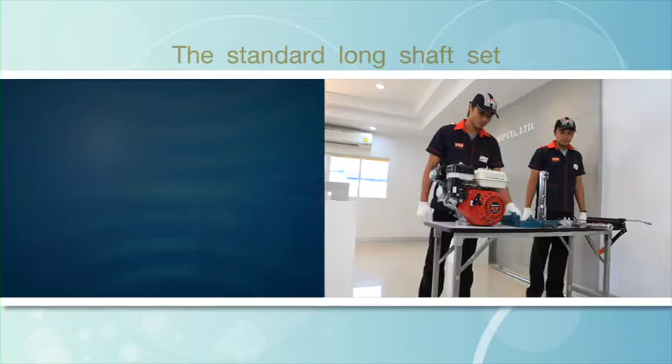The assembly of standard long shaft sets is conducted through the following steps.

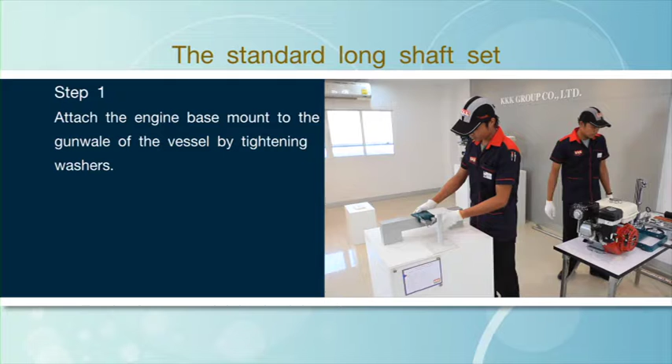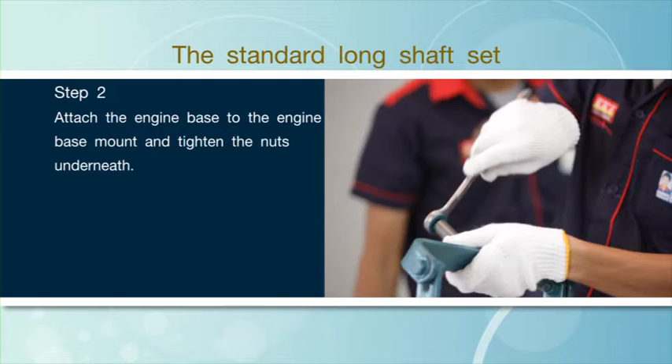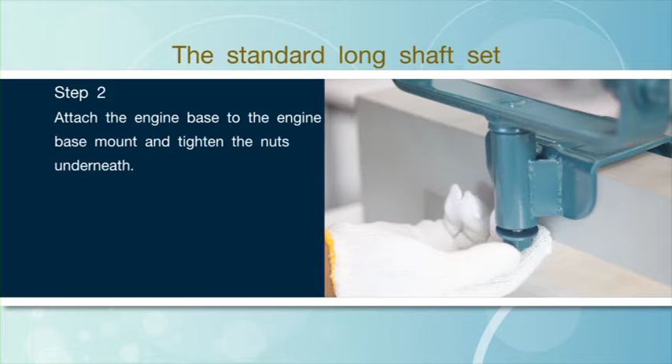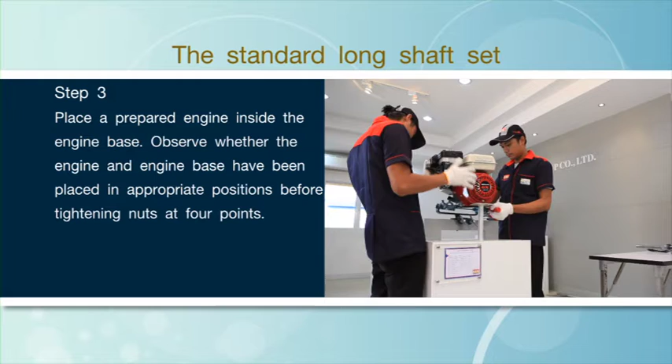Step 1: Attach the engine base mount to the gunwale of the vessel by tightening washers. Step 2: Attach the engine base to the engine base mount and tighten the nuts underneath. Step 3: Place a prepared engine inside the engine base. Observe whether the engine and engine base have been placed in appropriate positions before tightening nuts at 4 points.

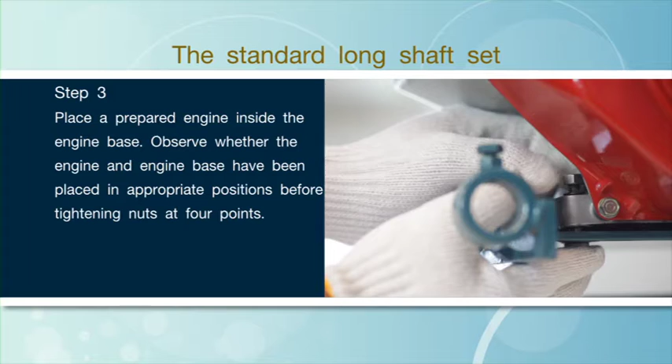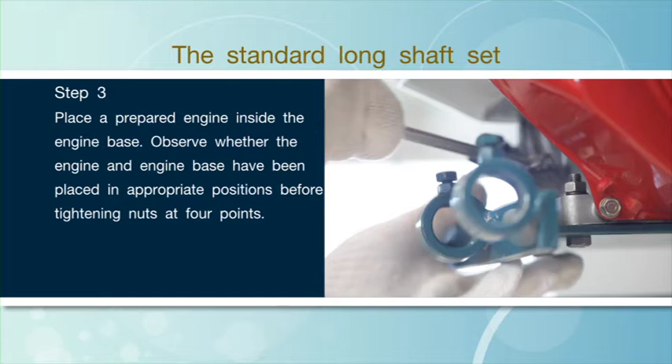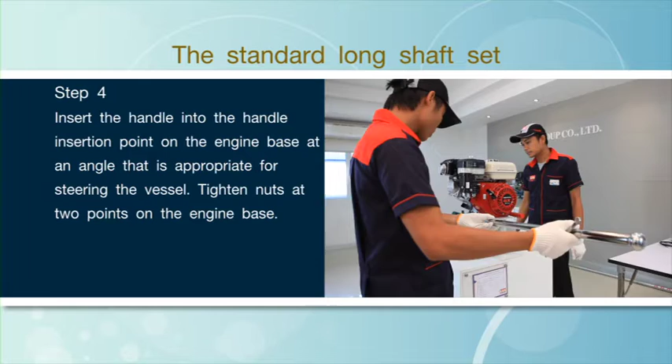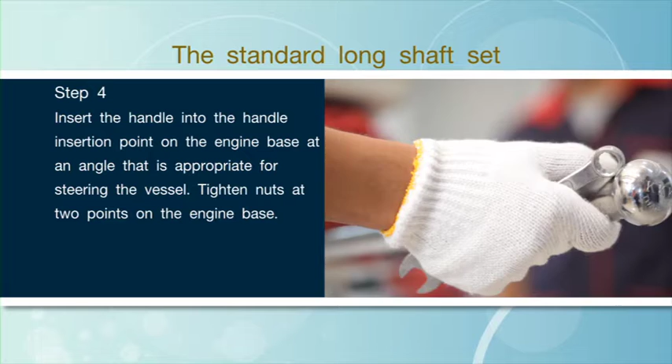Step 4: Insert the handle into the handle insertion point on the engine base at an angle that is appropriate for steering the vessel. Tighten nuts at 2 points on the engine base.

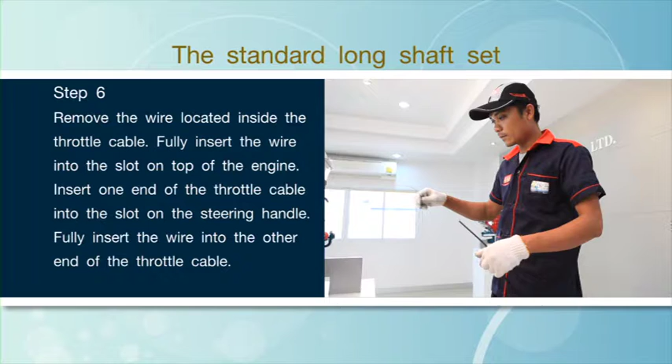Step 5: Unscrew the washers fastened to the filter plate that covers the throttle of the engine. Step 6: Remove the wire located inside the throttle cable. Fully insert the wire into the slot on top of the engine.

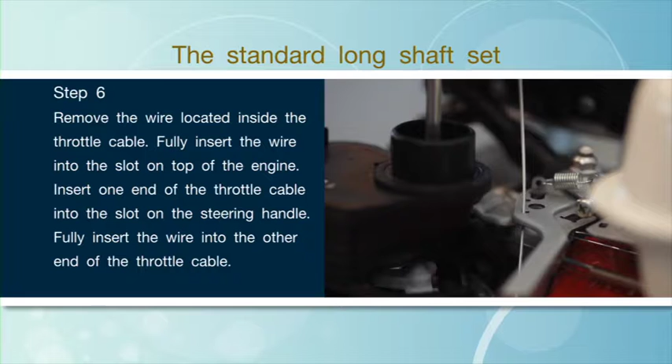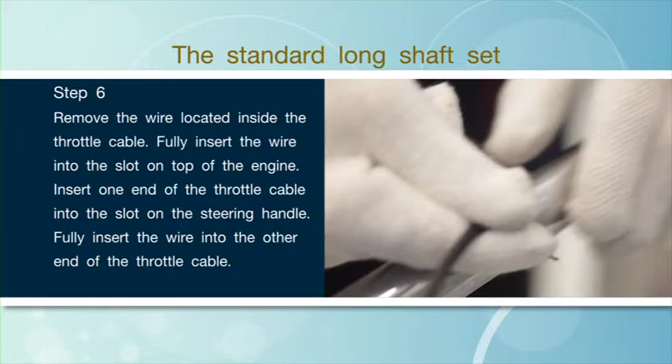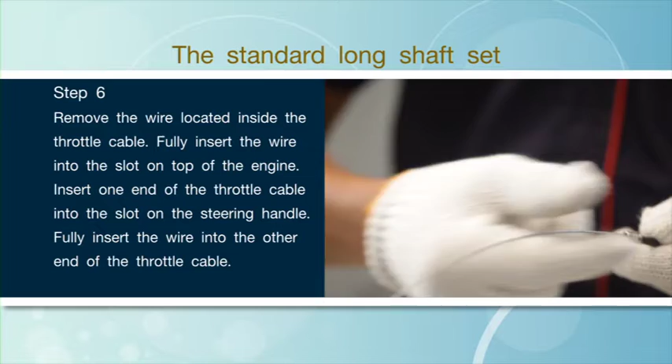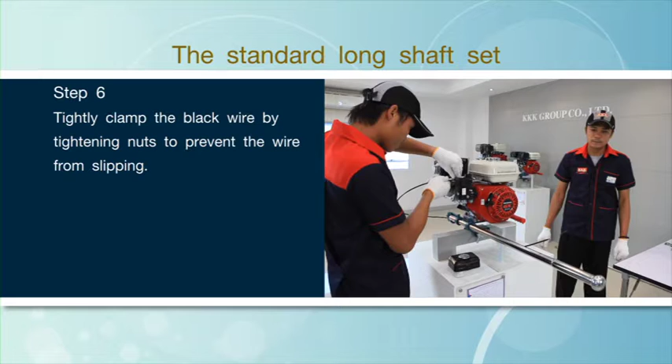Insert one end of the throttle cable into the slot on the steering handle. Fully insert the wire into the other end of the throttle cable. Tightly clamp the black wire by tightening nuts to prevent the wire from slipping.

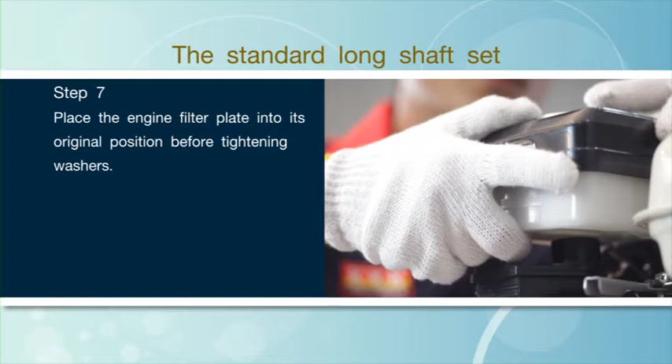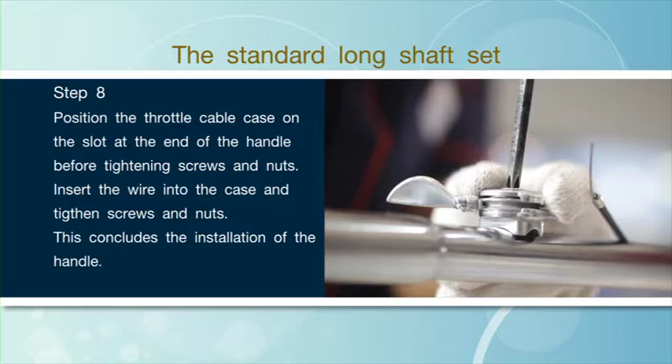Step 7: Place the engine filter plate into its original position before tightening washers. Step 8: Position the throttle cable case on the slot at the end of the handle before tightening screws and nuts. Insert the wire into the case and tighten screws and nuts. This concludes the installation of the handle.

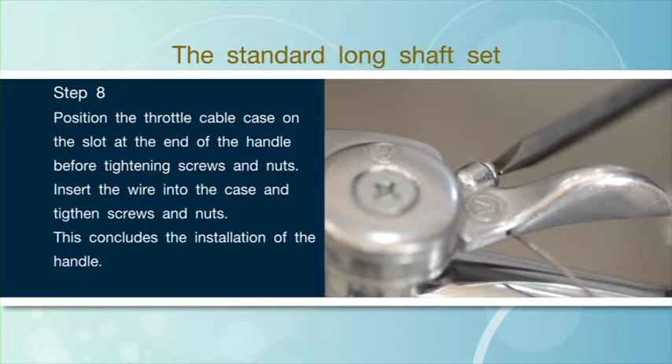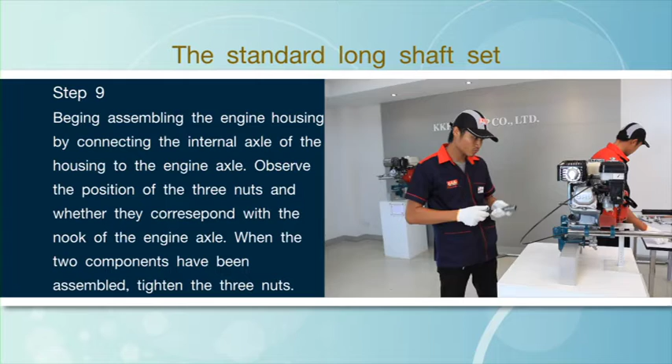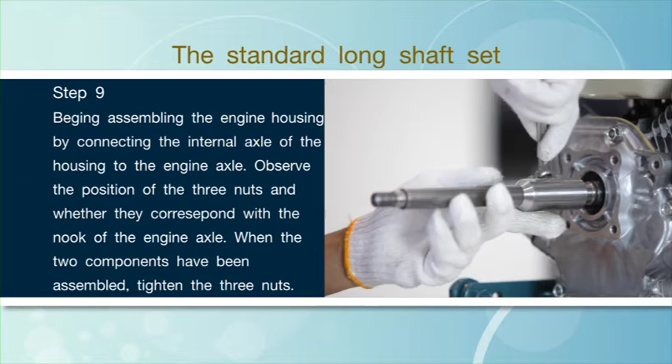Step 9: Begin assembling the engine housing by connecting the internal axle of the housing to the engine axle. Observe the position of the 3 nuts and whether they correspond with the nook of the engine axle. When the 2 components have been assembled, tighten the 3 nuts.

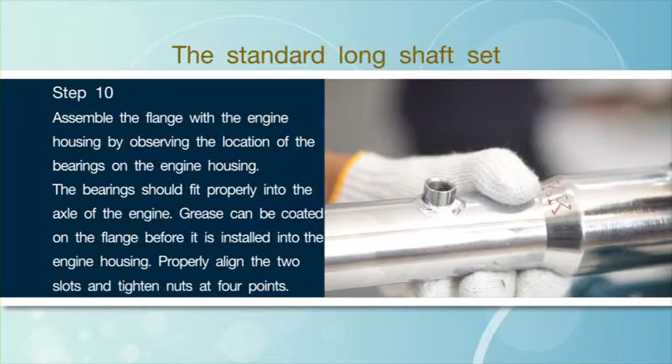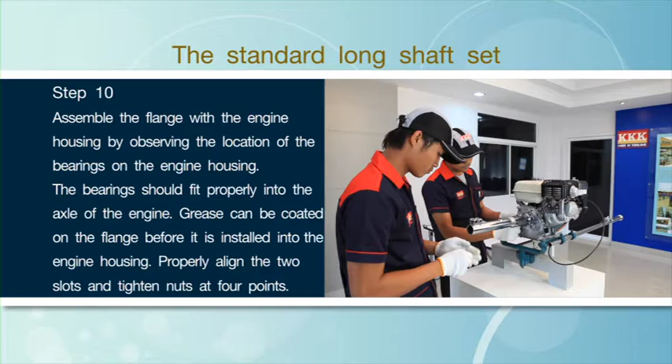Step 10: Assemble the flange with the engine housing by observing the location of the bearings on the engine housing. The bearings should fit properly into the axle of the engine. Grease can be coated on the flange before it is installed into the engine housing. Properly align the 2 slots and tighten nuts at 4 points.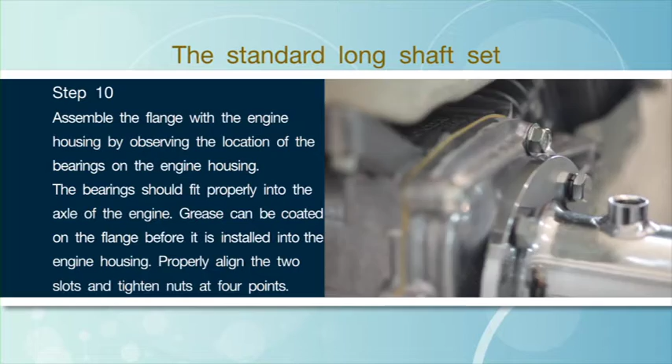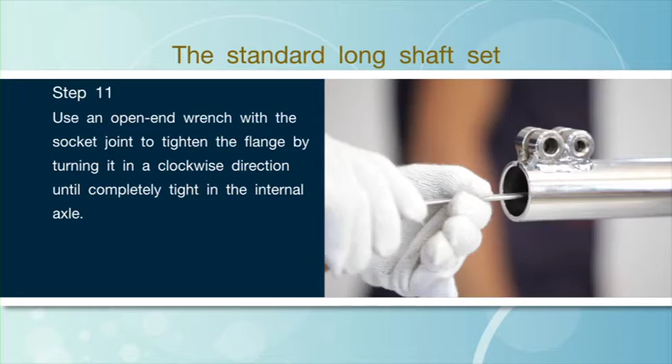Step 11: Use an open-end wrench with the socket joint to tighten the flange by turning it in a clockwise direction until completely tight in the internal axle.

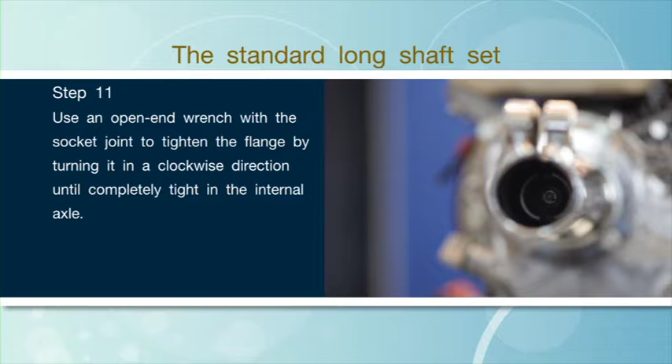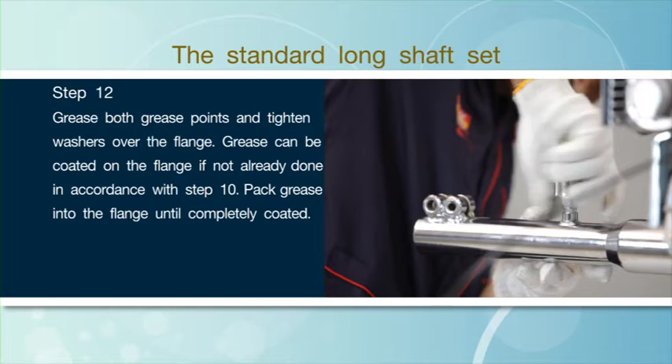Step 12: Grease both grease points and tighten washers over the flange. Grease can be coated on the flange if not already done in accordance with Step 10. Pack grease into the flange until completely coated.

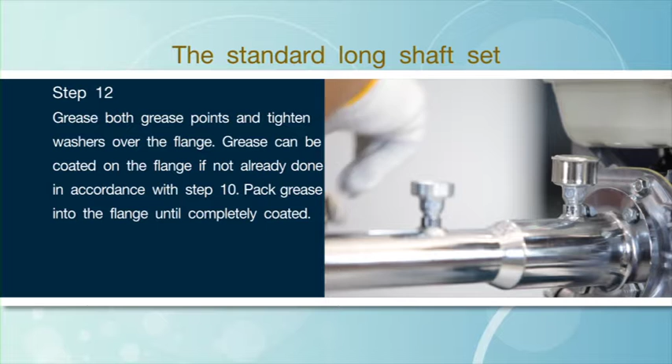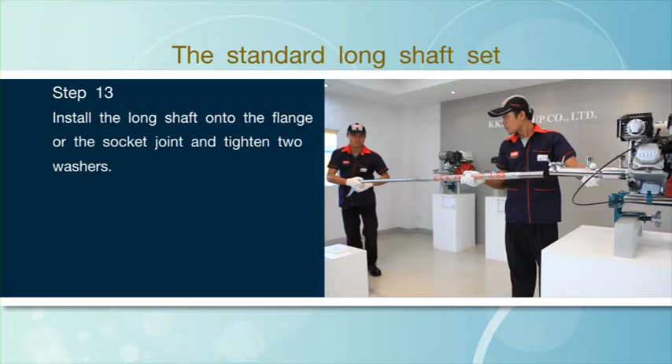Step 13: Install the long shaft onto the flange or the socket joint and tighten 2 washers.

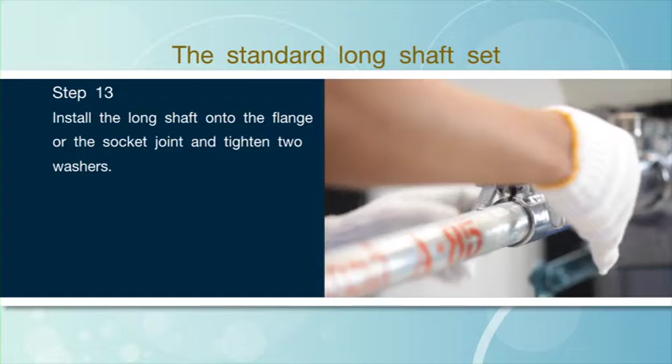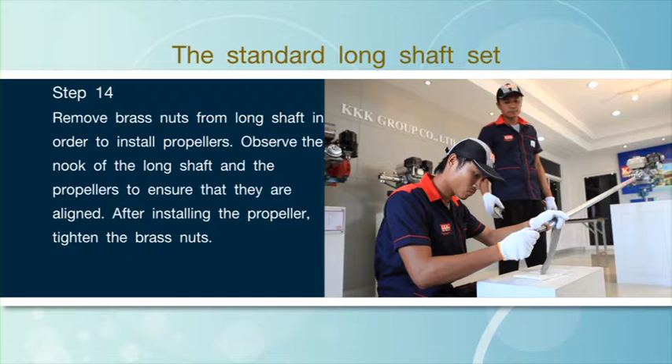Step 14: Remove brass nuts from the long shaft in order to install propellers. Observe the nook of the long shaft and the propellers to ensure that they are aligned. After installing the propeller, tighten the brass nuts.